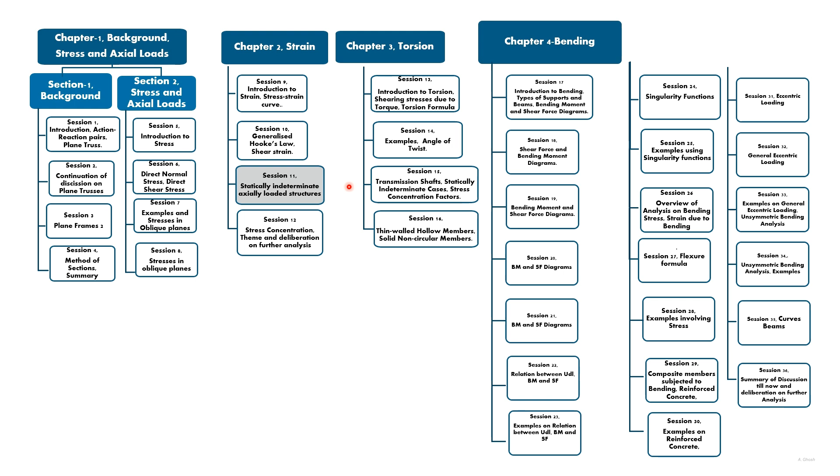This is the overall picture of the first 4 chapters. We think it is helpful to switch to this overall picture before we deal with the session at hand. This is the last main session in chapter 2, where we are dealing with strain and the relationship between strain and stress. Here we will discuss statically indeterminate structures of bodies subjected to axial loading.

Till now, we have dealt with statically determinate structures only. Hence, we could use equations of statics to find the external reactions acting on a structure. Once we had the external reactions, we could find the internal forces in members. Generally, with any type of loading applied to a structure, if the external reactions cannot be found using equations of statics, then the structure is statically indeterminate.

Here, the discussion will be limited to statically indeterminate structures subjected to axial loading only. Later on, we will deal with statically indeterminate structures with relation to torque, bending moment, etc. So let us start by discussing the analysis procedure of statically indeterminate structures.

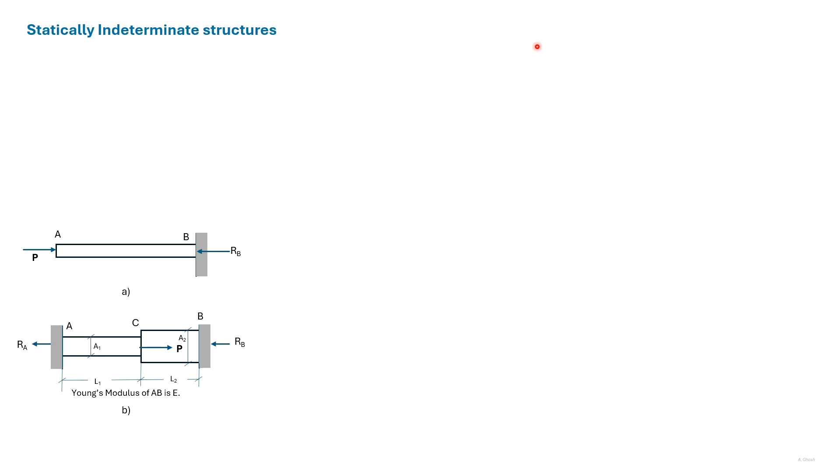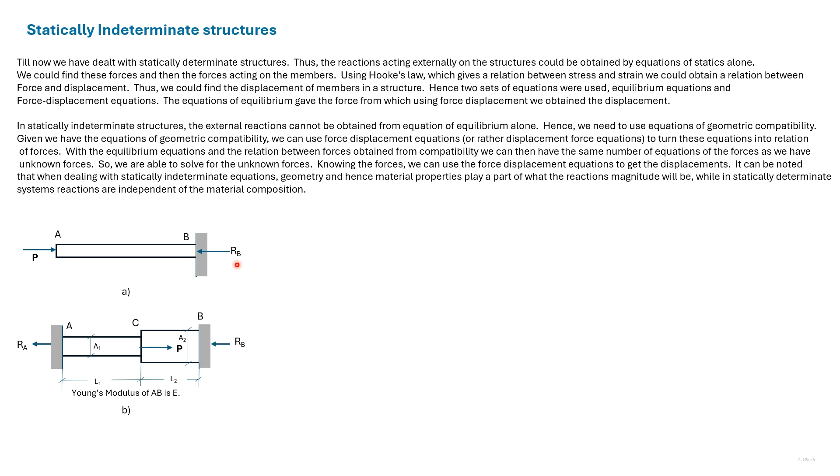We look at two simple cases, a determinate case and an indeterminate case. A here is a determinate case. AB is subjected to a compressive force and there is a reaction at B. Rb is the only reaction force, and Rb is equal to P, which we find out using statics. Having found out the force, we can use the force displacement relation to find out the displacement of AB. Thus, we use the equation delta equals PL by EA to find out delta AB.

In B, we see the case of a bar with two different cross sections held between two walls at A and B and subjected to a force P at C. So there are two reactions at A and B, RA and RB. But there's only one equation from statics, that is RA plus RB equals P. We need another relation between RA and RB to solve for the values of RA and RB.

Since A and B are fixed, the force P will cause AC to extend and CB to be compressed by the same amount. So this is a relation of geometric compatibility. So delta AC has to be equal to delta BC. This is a relation of displacement, which we can turn using force displacement relations into an equation of forces. We use the relation delta equals PL by EA on both sides.

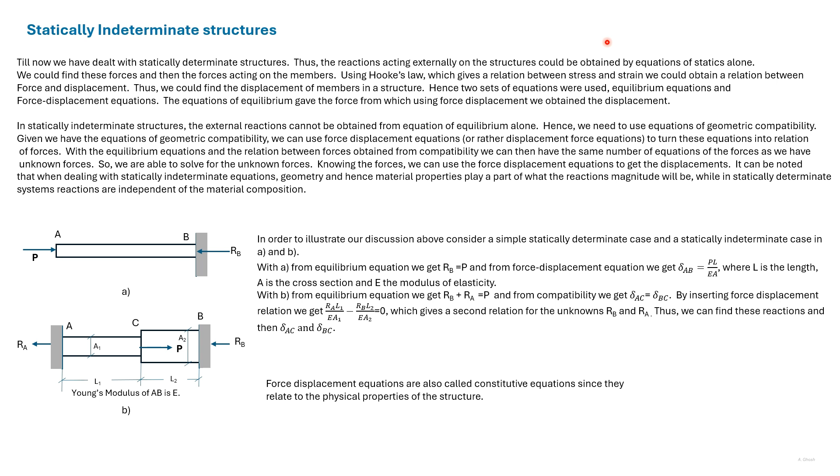In the previous example, we dealt with deformations that added up to zero. Among the different types of problems we will deal with, the deformations may add up to zero, they may be equal to each other, they may add up to a finite value, or they may be in proportion to each other. We'll deal with the case where the deformation is equal next. After that, we'll deal with two cases where we use the proportion of deformations based on geometry.

We have dealt with cases where we used the relation between deformation based on geometry in statically determinate structures. However, in those structures, we initially found the deformation at certain points, and were then asked to find the deformation at some other point, using the geometry of the structure. In statically indeterminate structures, the use of geometry is different. To start with, we do not know the external reactions acting on the structure. We use the relations between deformations based on geometry to find out the external reactions. After we have found the external reactions, we proceed to analyze the structure in a normal way.

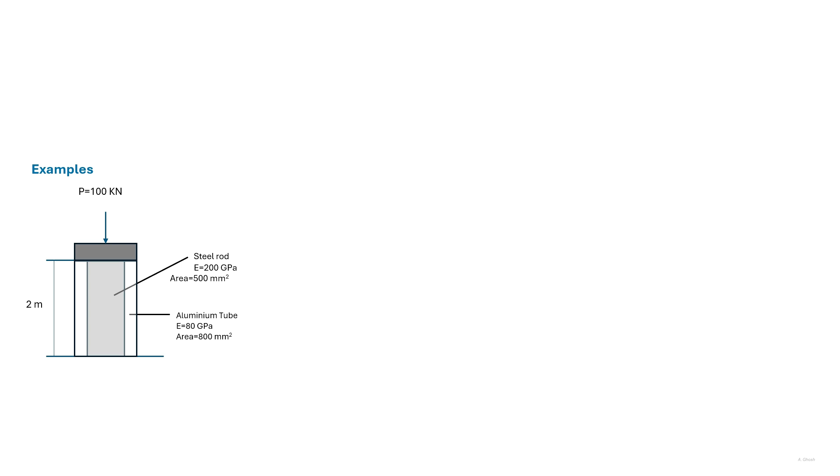We have a steel rod and an aluminum tube, and a load is acting as shown. There are two unknown forces, the force in the steel rod and the aluminum tube. These two forces add up to P. So from statics, we get the first equation.

For the second equation, we see that the deformation of the steel rod and the aluminum tube has to be equal. So delta S is equal to delta AL. We convert this equation of displacement into an equation involving forces by using the force displacement formula. So we get the second relationship, the second equation involving forces.

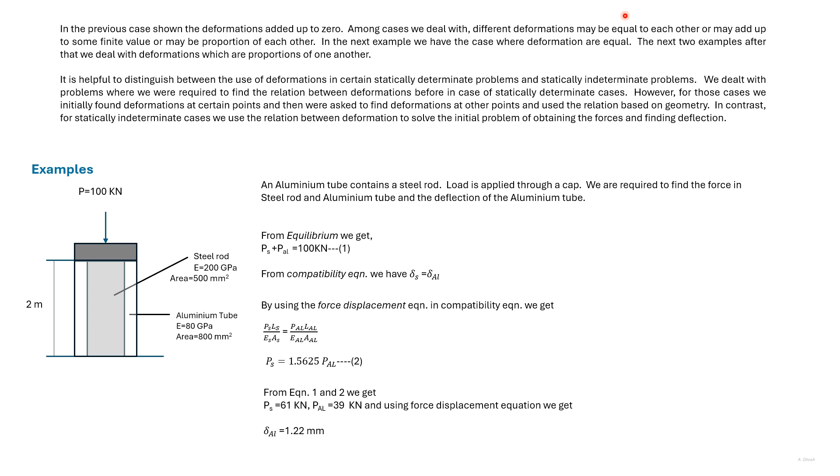From equation 1 and 2, we get the value of PS and PAL. Substituting PAL in this expression, we get delta AL, which is also delta S.

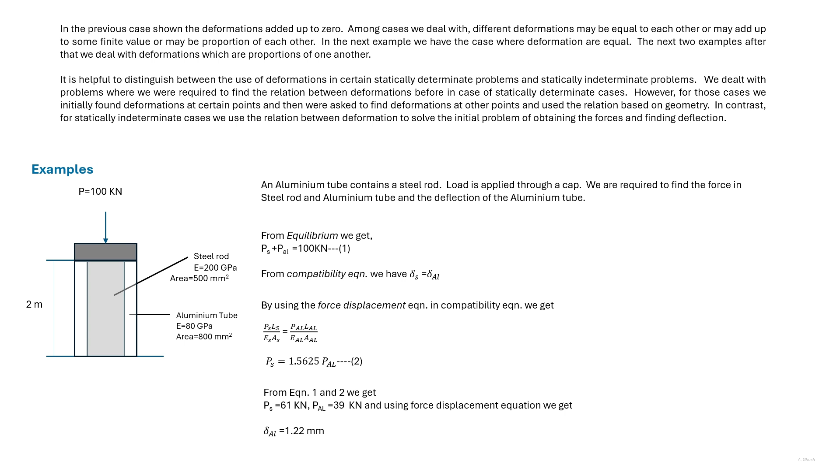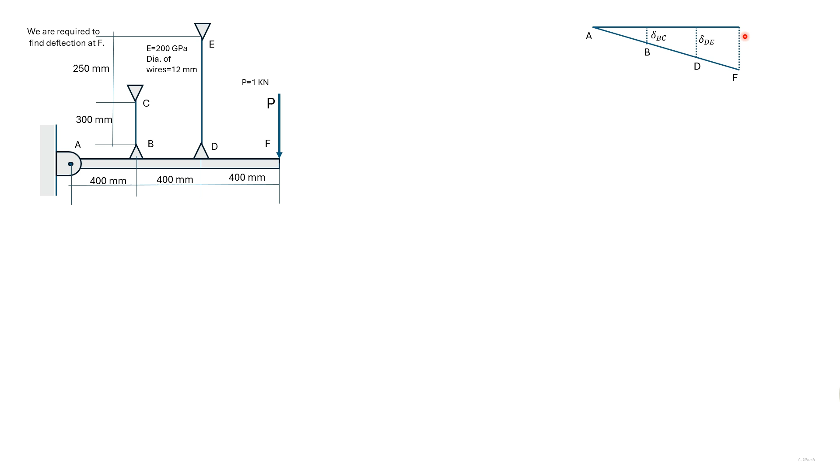So here we have the first relationship from equilibrium, and from compatibility, the second relation. This relation between deflections can be changed into a relation of forces by using deflection force equations, so we have used delta equals PL by EA. One would note that the lengths of these two wires are different, so we get a relation between RD and RB here.

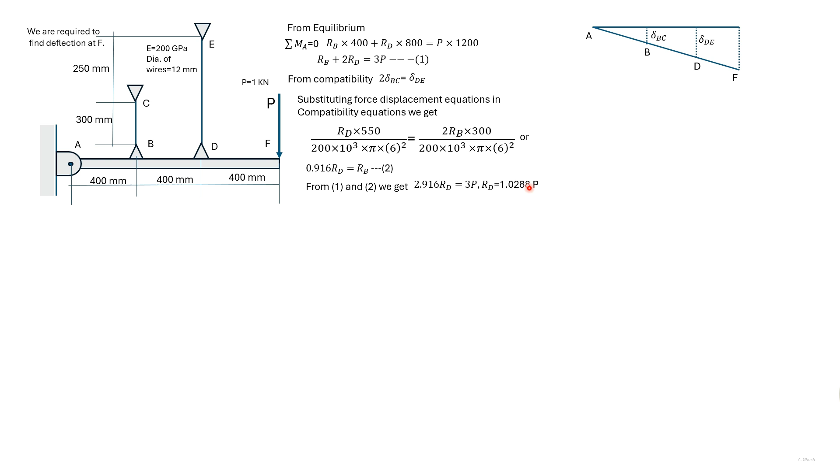So now we have two relations between RD and RB, and we can find RD in terms of P. Knowing the value of P, we can find the value of RD.

Now using delta equals PL by EA, we can find delta DE. Once we have delta DE, the deflection at F is 1.5 times delta DE. So we can get the deflection at F.

So here we have the second problem, which is similar to the first problem. The bar ABC is hung by three wires, and a force P is applied at D. We have three unknowns here, the forces in the three wires, and we have two equations of statics, taking moment about A and C. The third relation we have to find from compatibility.

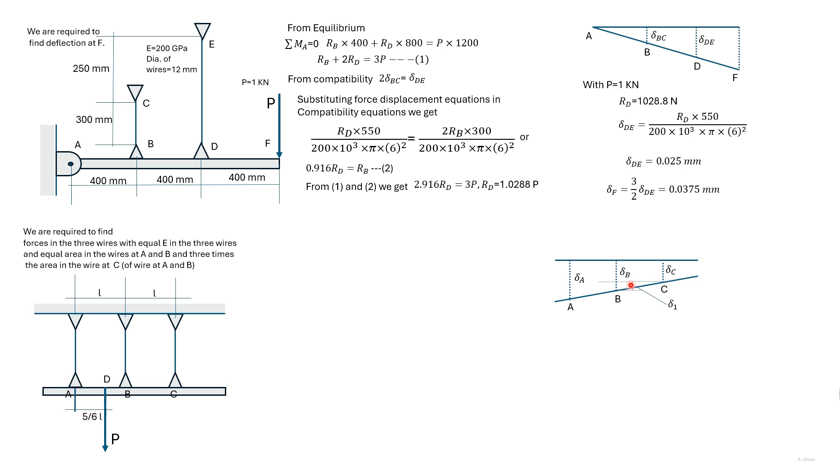So A, B, C, being a bar, it will deflect in this manner. The lengths of AB and BC being the same, if the difference between delta B and delta C is delta 1, then the difference between delta A and delta B will also be delta 1.

So here we have taken moments about the two points, and we have a relation between RB and RA, and a relation between RB and RC. And from compatibility, we have delta A minus delta B equals delta B minus delta C, which using the deflection force relation turns into a relation of forces RB, RA, and RC.

Now using equation 5 and equation 1, we can multiply one of the equations to eliminate RB, and then we'll get a relation between RA and RC, which we have as equation 6. Similarly, with equation 5 and equation 2, we can eliminate RB, and we can have a relation between RA and RC, which we have as equation 7.

Using the two simultaneous equations, we can find RC. Now, substituting RC in equation 6, we find RA, and with RA known, substituting that in equation 1, we can find RB.

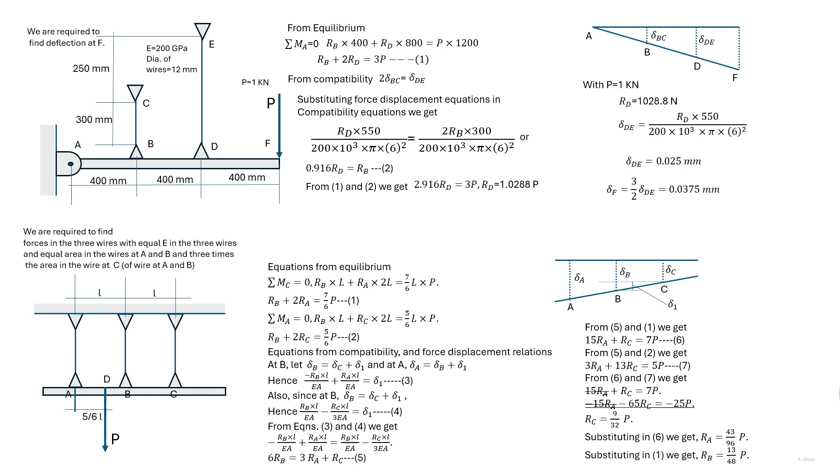The cases of statically indeterminate structures that we have dealt with till now can be considered as normal cases. Apart from these, there are special cases involving thermal strain, misfits, and pre-strain. Among other special cases are settlement in structures.

In statically determinate cases, thermal strains, misfits, or pre-strains do not cause forces generally. However, in statically indeterminate cases, even without external loads, thermal strains, misfits, and pre-strain can cause forces. These forces are in equilibrium. As previously, among cases, deformations may add up to zero, they may be equal, they may add up to some finite value, or they may be in proportion to each other.

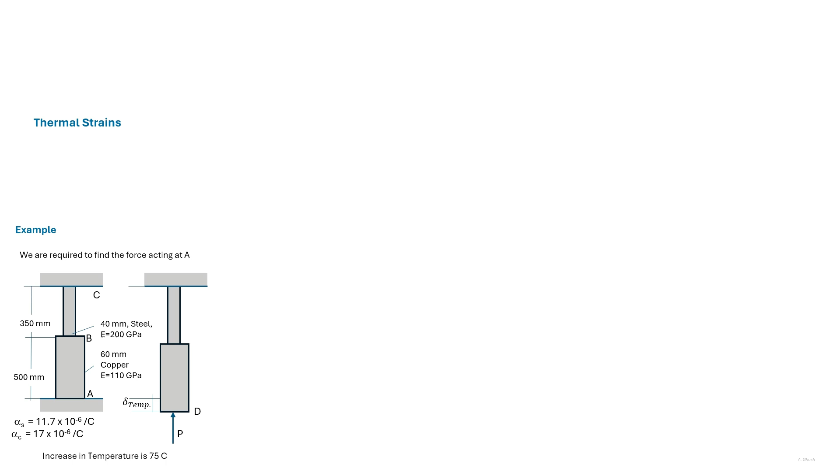We consider a thermal strain case here. A body whose temperature is raised will expand in all directions. The coefficient of thermal expansion is the expansion per unit length and unit increase in temperature, and is denoted by alpha.

Hence, if a bar is of length L and its temperature is increased by delta T, then the increase in length would be alpha delta T into L. Like the equation between force and displacement is called a force displacement equation, the relation between temperature and displacement is called a temperature displacement relation.

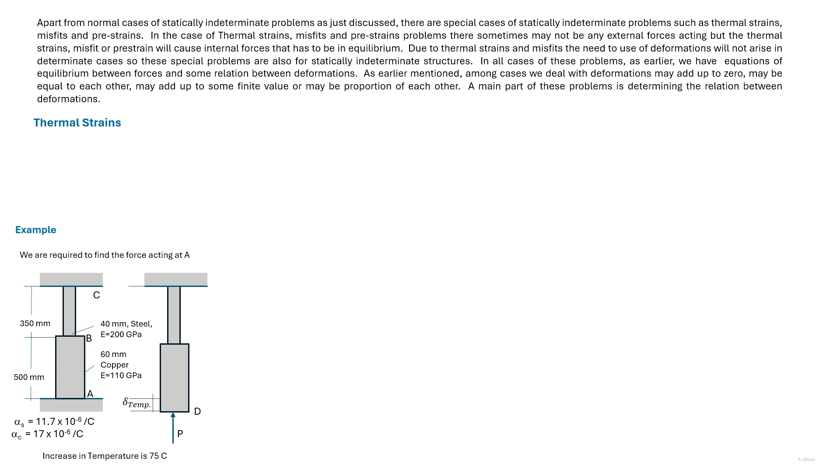The case here consists of a steel bar and a copper bar. A and C are fixed and the temperature has been raised by 75 degrees. We need to find the forces at A and C. We understand this problem by considering that the end A is released.

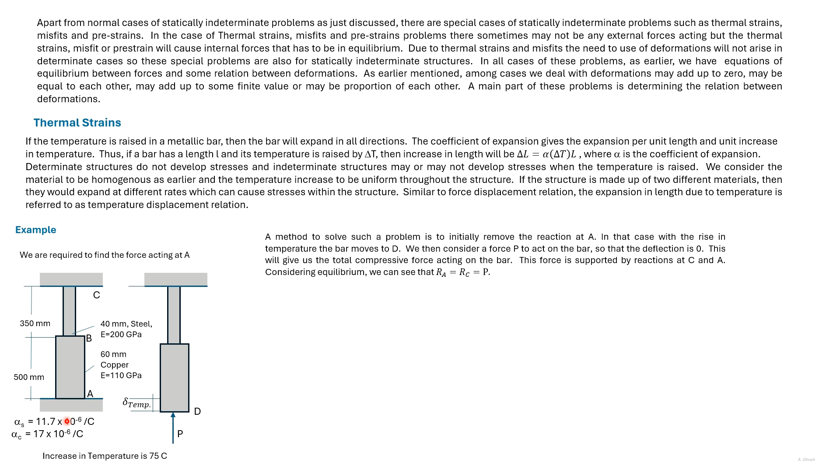If the end A is released, then with the increase of temperature, the whole bar will increase in length. We say the increase in length is delta temperature. Then we apply a force P so that this bar returns to the original length. Then force P is equal to Ra, which will be equal to Rc, and delta temperature is equal to delta force.

We find out the increase in length of the bar due to temperature first. The relations as earlier mentioned are called temperature displacement relation. So for steel, we have the coefficient of expansion multiplied by the increase in temperature and length. And for copper, we have the coefficient of expansion and temperature and length. We add these two up to get the total increase due to temperature.

We next find the decrease in length due to force. Now there are two parts here: one is the copper and the other is the steel. So they have different areas and different Young's modulus and length. So we need to find the increase in length individually and add them.

We find the increase in length using delta is PL by EA, and the total length would be the delta force. Earlier we have obtained the delta temperature, so we equate delta force and delta temperature, from which we find P. Now P is also Ra and Rc.

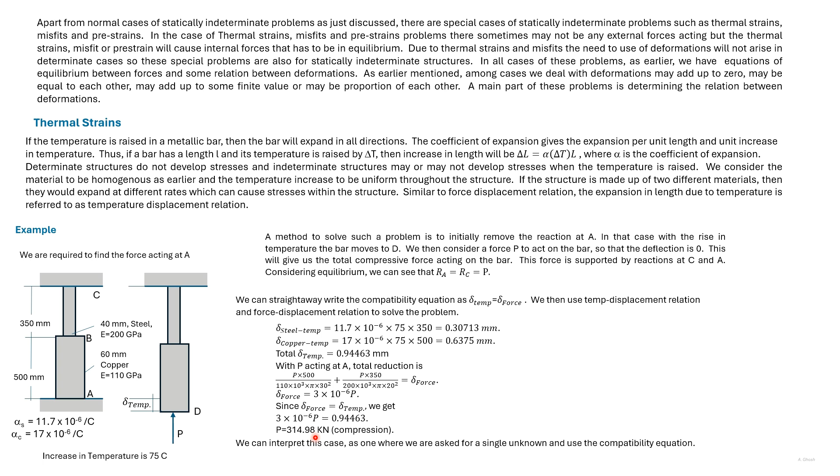This is another example of thermal strain. The initial temperature of the arrangement is given. The temperature of the arrangement is raised, but we are not told how much. Due to the raising of temperature, it is mentioned that the stress in steel attains a certain value. So we are asked to find the increase in temperature and the increase in the length of the steel portion.

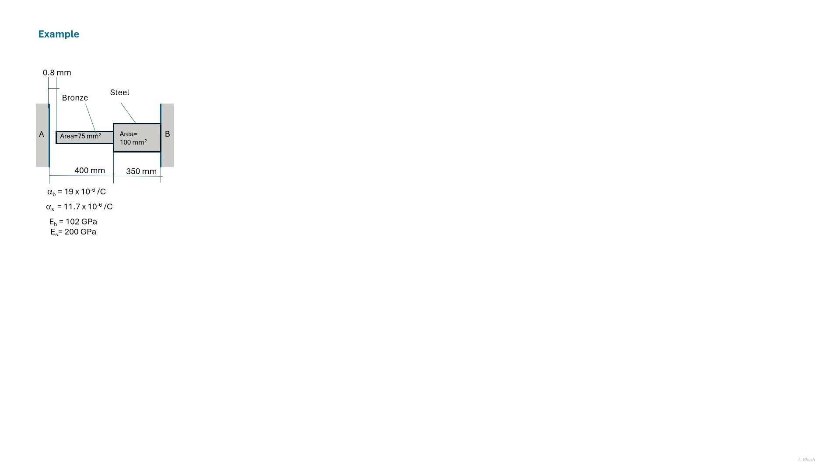The problem can be seen as the reverse of the previous problem, since we are asked to find a temperature increase. The problem can be understood in a similar way to the previous problem.

With the increase in temperature, both the steel portion and the bronze portion increase. Initially consider that there's no support at A, so they can freely increase in length. Then consider that force Ra has been applied, and due to this force, the bronze and steel portion revert back to this line.

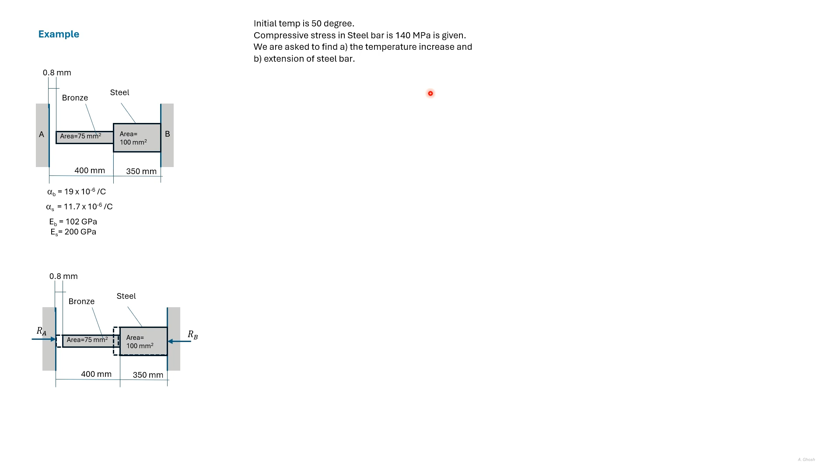This force causes a stress in steel, which is given. So multiplying the area of steel by the stress, we get Ra and Rb. So that covers the equation of statics.

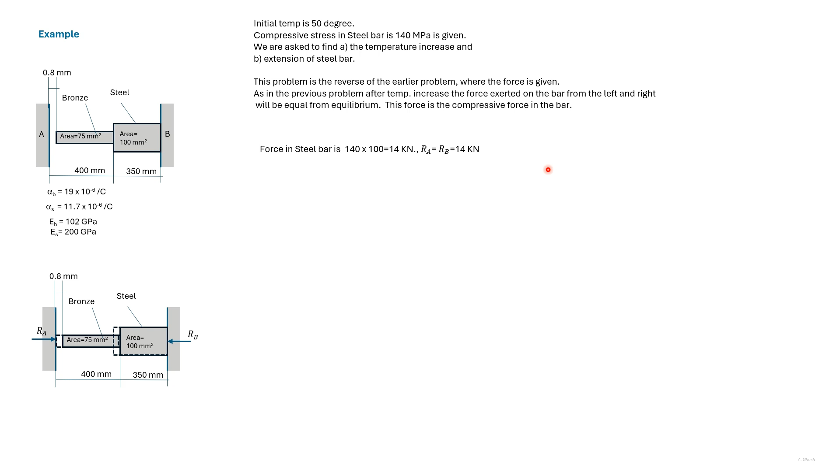We'll now look at the equation of compatibility. With compatibility, we mentioned that there are different cases: one is that deflections are equal, or deflections add up to 0, or deflections add up to a finite value. So in this case, the deflections add up to a finite value, which is 0.8.

So with temperature, the bar will increase in size, and with the force it will decrease the bar in size, but not totally, so that there is a gap of 0.8 millimeter.

Now, this is an equation of delta, so we can use displacement force equation and displacement temperature relations in this equation. We know the force, so we substitute delta is PL by EA, and delta L is equal to alpha delta T into L for the two different portions, from which we get the increase in temperature.

The initial temperature was given, so adding that up, we get the total temperature. Since we now know the increase in temperature, we can find how much the steel has extended. So we can use the increase in length due to temperature and subtract it from the increase or decrease in length due to force. So we find the total increase in length and the total length.

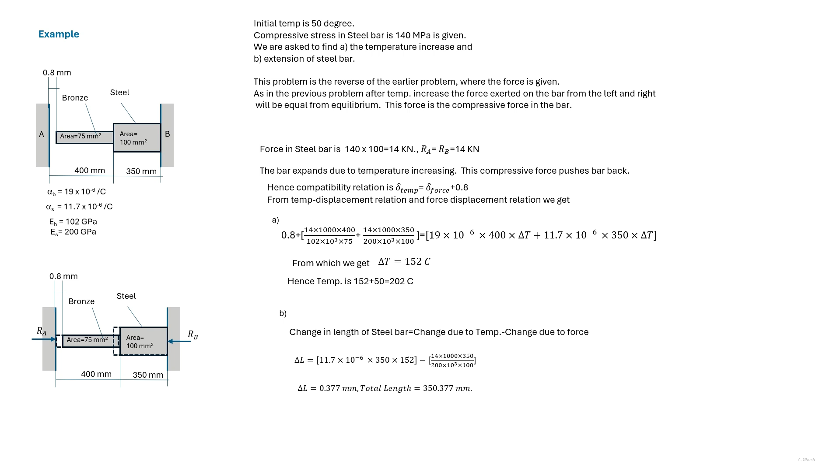Statically indeterminate problems include misfits and pre-strains. Sometimes structural assemblies do not have the specification originally intended. This is due to error. So some members may be incrementally smaller or larger than specifications mentioned. This is called a misfit. If the assembly is indeterminate, then this can induce inbuilt stresses in structures.

On the other hand, we may deliberately introduce initial strain in structures. Such structures can have strain and stress without loading.

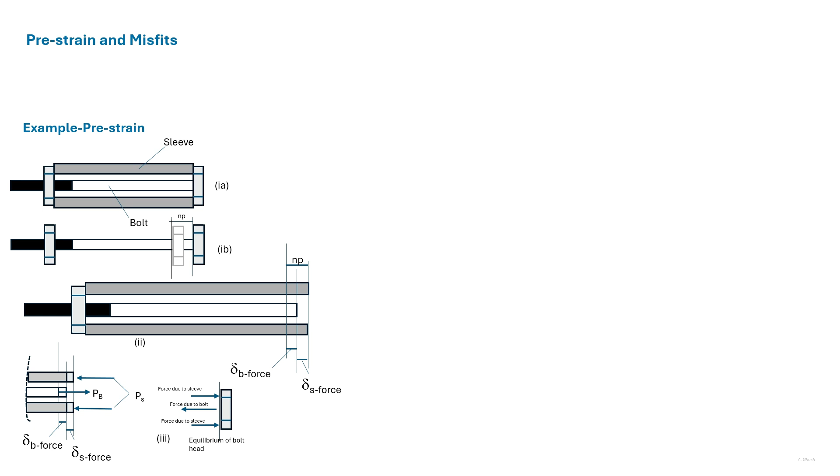As an example, consider this assembly. This is a bolt, this is a bolt head, and this is a sleeve. The pitch of the bolt is P, and the bolt is given n turns. So if there was no sleeve, then the bolt would reduce by a length np.

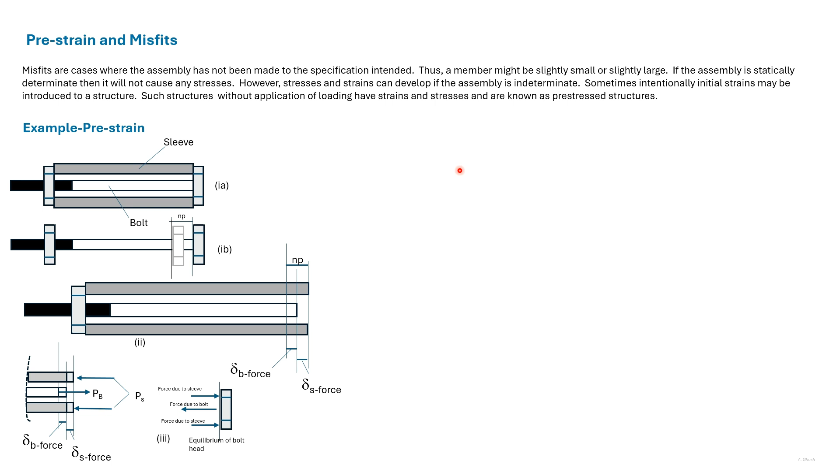Now let us look at forces first. This diagram is the equilibrium diagram of the bolt head. Since we have tried to shorten the bolt, it pulls the bolt head with a force. However, the sleeve prevents this, and there's a force in the opposite direction. The bolt head is in equilibrium due to these two forces. Since there's no other forces, these two forces would be equal and opposite.

There will be reaction forces on this left part of the structure, without the bolt head, by the bolt head, as shown here. So these two are action-reaction forces, and these two also are action-reaction forces. Due to the forces of the bolt head, the sleeve is being compressed and the bolt is being extended. We have earlier seen that PS is equal to PB.

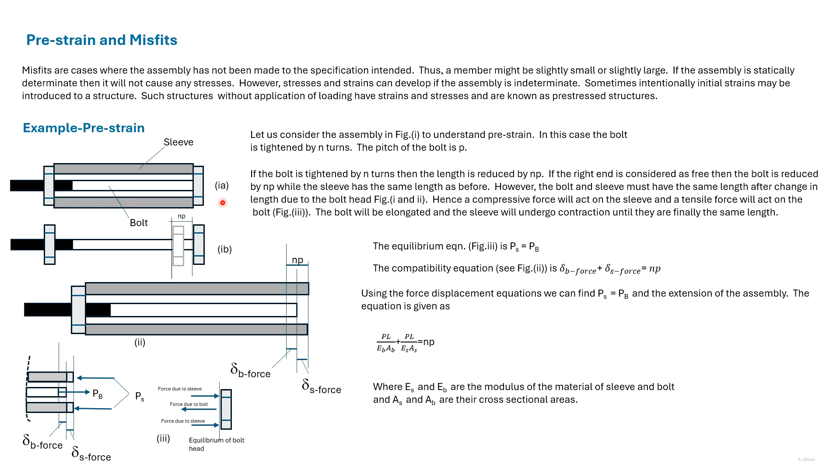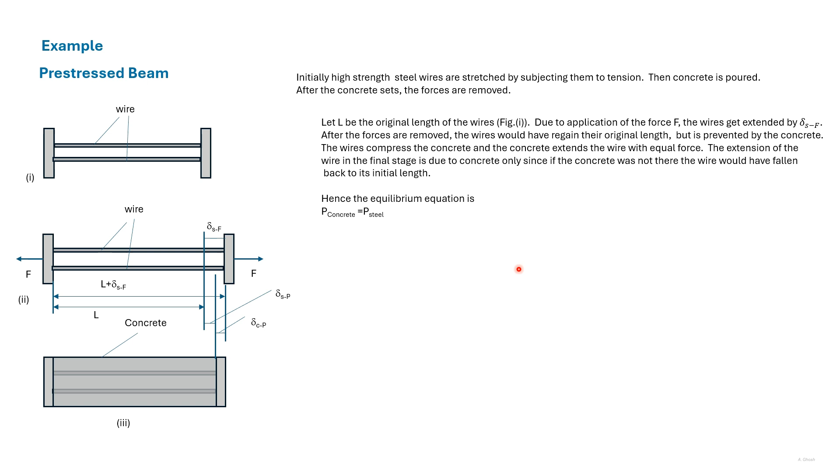Here we can see that due to the concrete, the wire has extended. So that is given by del SP. And due to the wire, the concrete has contracted, which is shown as del CP. And these two add up to del SF, which was the original extension of the wire due to the force F. So this gives us the relation of deformation.

Now substituting the force displacement relation, we get this equation. Notice that this is F and these are P. From this equation we can get P, that is the force between the concrete and the steel, and we can get the stresses in concrete and steel and the final deflection.